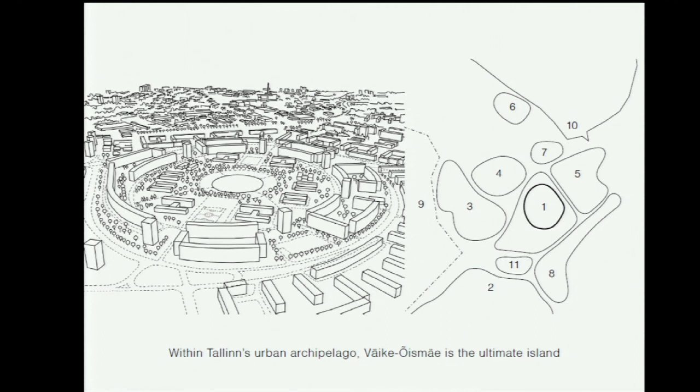After a site analysis that we made, we realized that it's actually possible to read this whole part of the city as a sort of archipelago of different neighborhoods that on one hand are tightly sitting next to each other, but at the same time are separated by different functions, culture, or natural features. Whereas all the other islands of this archipelago are already city attractors due to their features, our site was still perceived more as a sleeping district that doesn't have many things to offer, so people rather flee away than come and visit this place.

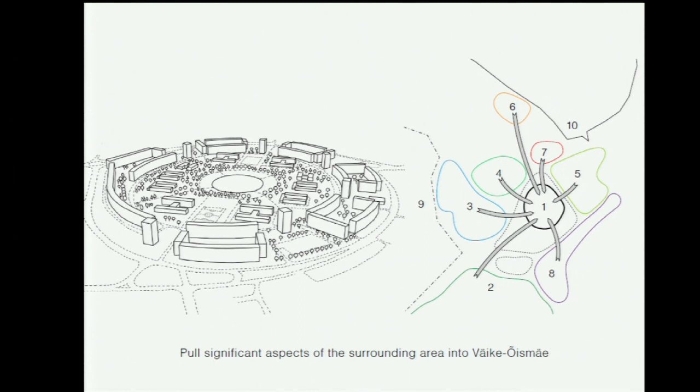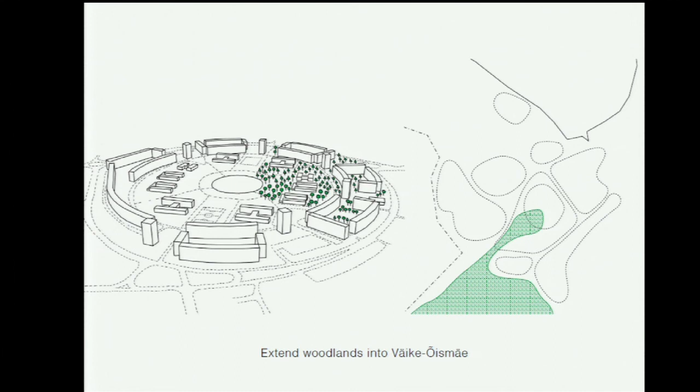So we decided to pull the qualities and features from surrounding neighborhoods to its geographical center, which is our site. How did we do it? We decided to densify the woodlands on one part of our site, and this densification could protrude to the woodlands already existing on the south. We connected the neighboring lake with the pond that is now the center of the site.

We are reintroducing the natural grasslands that are now found to the northwest. And we are also proposing a cooperation with the neighboring zoo, maybe not in terms of letting animals run around our place, but perhaps in offering some activities for citizens to give them a connection with nature, or part of nature.

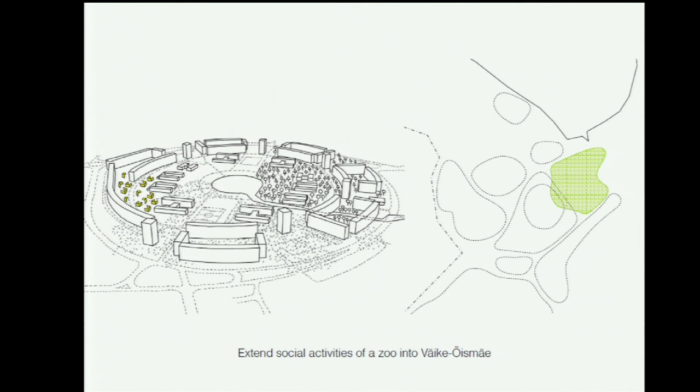But at the same time we thought that the architectural features of this site are some historical heritage that we definitely want to preserve. What's also interesting to preserve, perhaps just to speak about it in future, is this kind of intangible heritage and the spirit of Väike-Õismäe as it was when it was actually built, how it was meant, and for some period, as we understood, it worked quite well. It was quite a favorite place to live.

So we decided to dedicate one part to an open-air museum that would, similarly to those farms next to the coast, simulate some sort of period in the urban development of the city.

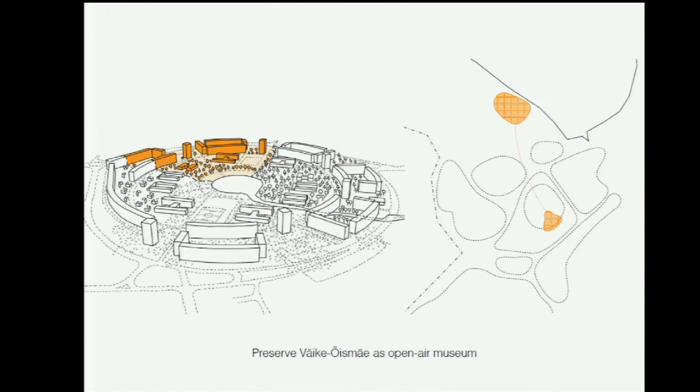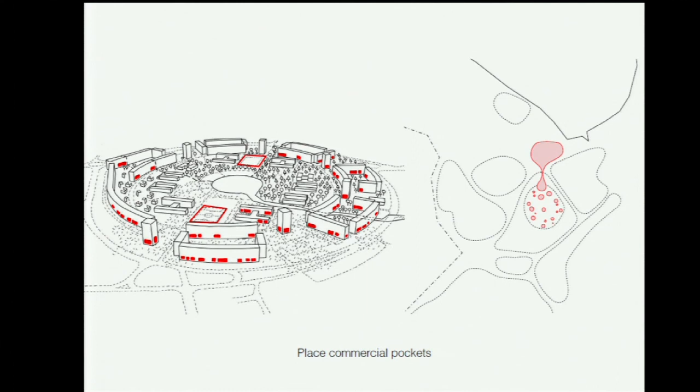But there is more. On the north, there is a commercial and sport center which is now very frequently visited. We decided to pull this one into our site as well. Maybe not in terms of changing the landscape, but perhaps in introducing different facilities and functions into this, until now, monotonous, monofunctional residential district.

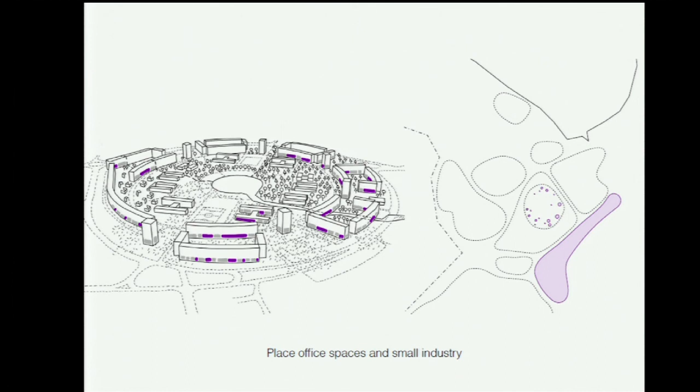And similarly to that, we would work with this part that comprises mostly small industries. So we were trying to pull the functioning city back to its natural center and create a kind of meeting point for all the neighborhoods, while preserving the tangible historical heritage of the whole site.

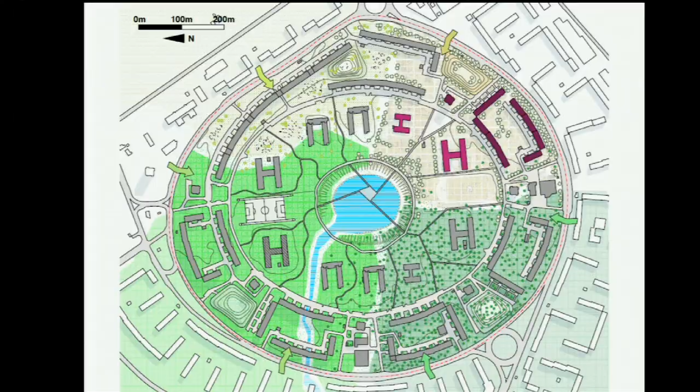Until now I was speaking more from the urban point of view, but of course what is most important is how it's perceived by citizens or residents. I'll give the mic to Lindsay, who will tell you about the second part.

So at the scale of the buildings here in the neighborhood, we wanted to both preserve the architectural heritage and intangible qualities that are so essential to its history, but also revitalize it through small architectural moves and deconstructions.

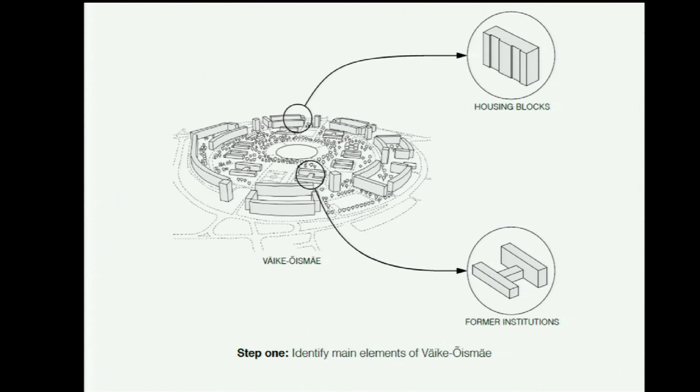We recognized there were two typologies: the large housing blocks on site, and former institutions like the school we're sitting in now, which we could be a bit more experimental with because of their questionable future.

Our idea was to really liberate the ground plane on site by removing the facade panels from the first two floors of the housing blocks and reintroducing the various programs Andre mentioned - commercial activity, office spaces, creative studios, small businesses that residents of the community could actually take part in.

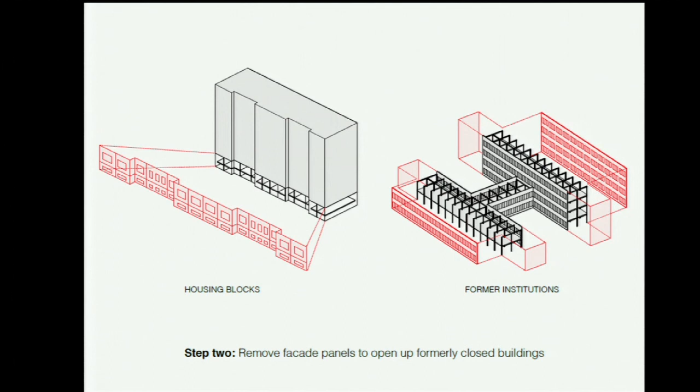By physically opening up the space, it would also create a visual connection. For the school we're sitting in, we could be even more radical and completely deconstruct the facade, leaving a framework for community activities and a new platform for social interaction.

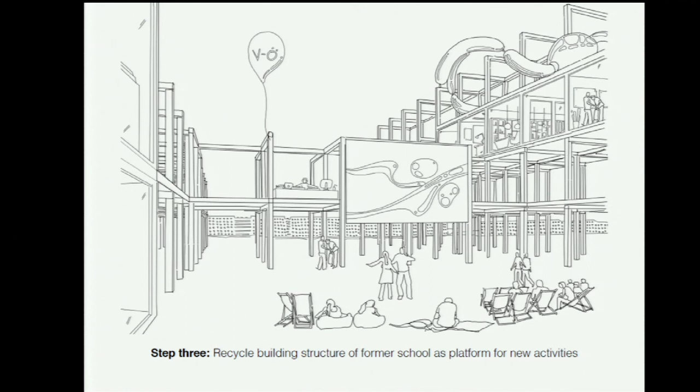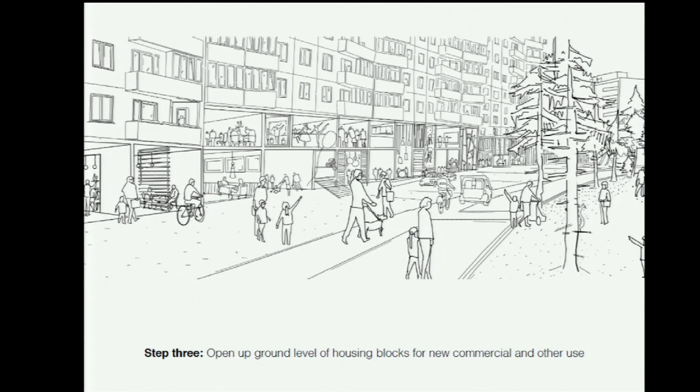This space could really become a new communal and social generator - something quite exciting. By opening up the ground levels of the housing blocks, we can create new spaces for commercial activity and different uses that would bring different people from the city to the neighborhood at different points during the day, creating a very vibrant urban community.

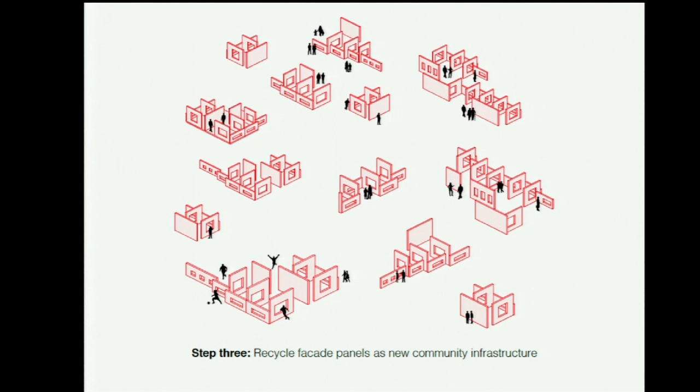We also thought that the material gained from taking away the facade panels could actually be reused or recycled as new community infrastructure, becoming material for a community market and for small architectural interventions on site.

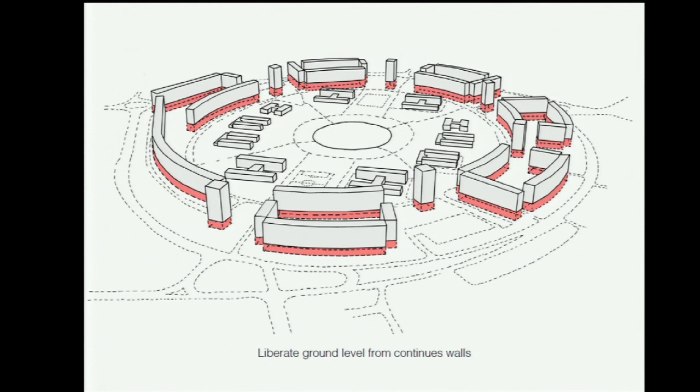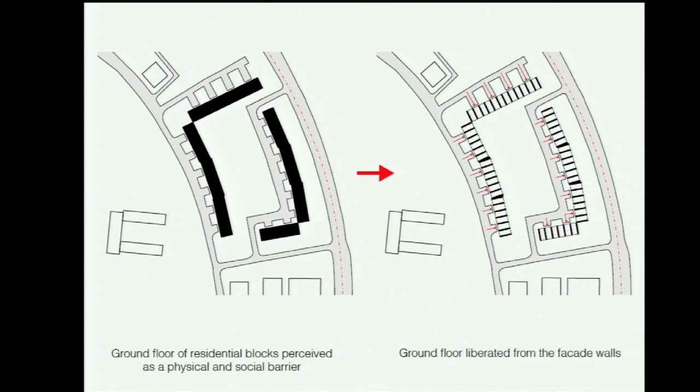So we've liberated the ground plane from the existing walls while preserving the architectural heritage of the site. What is currently sort of barriers at the ground plane will become a liberated landscape with visual and social connections through all the buildings.

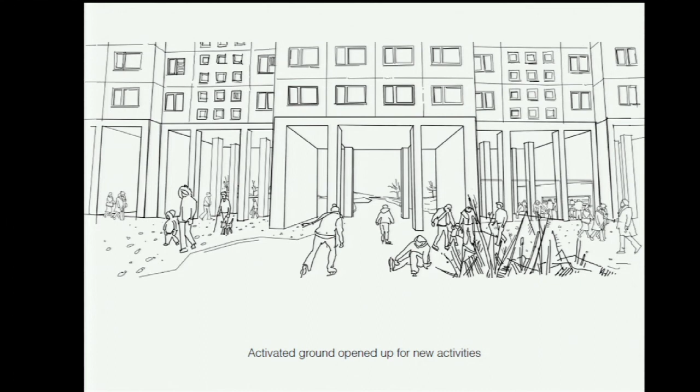You can see some of our ideas about this becoming a space for year-round use and new types of activity and experience of the existing architectural heritage, creating the existing landscape and center of the neighborhood as a new cultural venue and destination in the city.

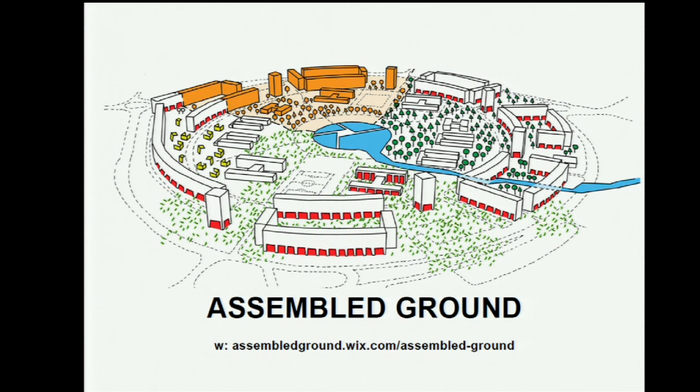We thought this proposal is something that could be implemented over time, in a very community-based way, happening at any time scale appropriate for the best experience of both the residents and the larger city of Tallinn. So, thank you.

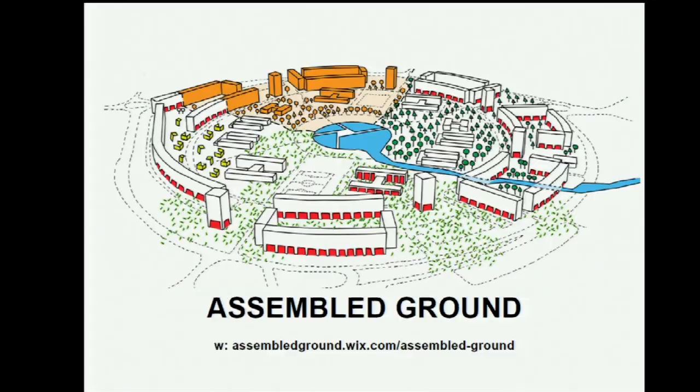Maybe I'll start with the first question - I was wondering if you considered the different possibilities of reusing the panels. Who will actually think of the design, how to use them, or how would it happen? Are there different stages you thought of?

Well, I think part of the phasing of the project would allow for that to happen incrementally. The panels are removed at a pace with which they can be reused immediately, not that there would be a pile of material sitting in the neighborhood for years and years.

So if you take maybe one floor of the building off at a time, it's very easy to experiment, maybe host some events where the community can actually take part in thinking of ways to reassemble the panels, and also invite the creative community of Tallinn into that discussion.

So it really becomes a sort of community-generated design with the influence of people that live here, as well as the larger architectural community. I completely agree with what Lindsay is saying, but I'm also aware that this presentation maybe gave more questions than it gave answers to something immediately.